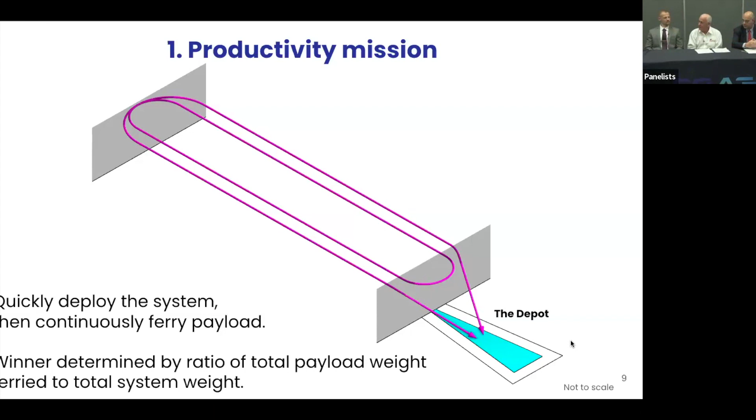No, I don't think that's necessary if you're looking at just this mission, as opposed to the other ones. And again, you could have a heavier vehicle that could carry a lot more of the weight and

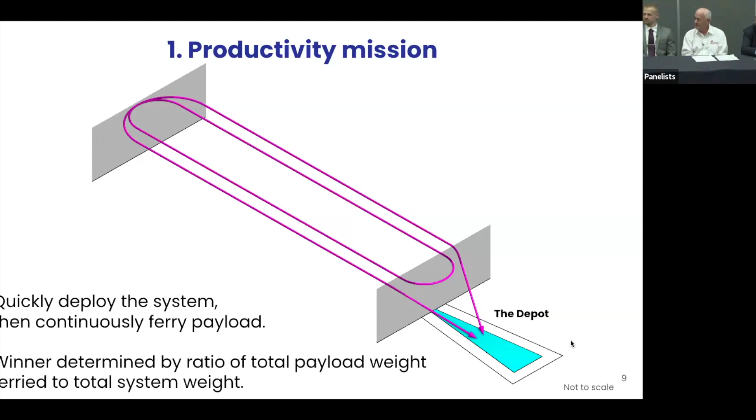minimize the number of times that you have to make the cycle to reach the minimum weight required to score. So I've heard about what the power plant is, what the configuration is, and Mark talks about actually the sizing mission, whether you size it just for one of those loads and do many, as Luigi said, 9 of them, or as Mark said, maybe bigger aircraft do less. Those are the choices available.

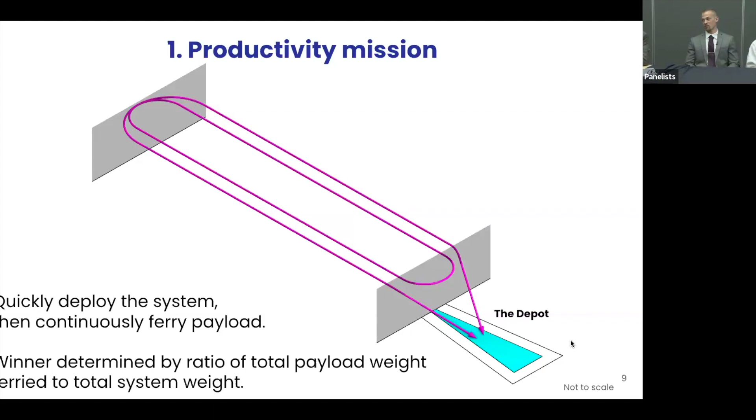Jason, thoughts? Sure, so I'll share a little bit of a unique perspective, but a little bit in agreement with what Luigi pointed out. For the competition that I run, the Vertical Flight Society's Design Build Vertical Flight Competition, one of the toughest aspects that the teams probably don't really anticipate ahead of time are the operation side of things.

So not only how well their performance of the aircraft is going to be, but actually when we give them access to the flight line, they're on the clock. And so when we say, okay, you're up, they have to get out on the flight line, turn on the aircraft, get everything hooked up, get their ground control station and their autopilot and everything like this set up. And that's usually what takes the longest amount of time.

So in this first part of the course and part of the mission, I think maybe the swapping of payload, physically getting the aircraft onto the field and getting it operational is going to be a challenge that the teams probably aren't too concerned about yet. And I think that's maybe where the emphasis should be.

Right, so inserted into the mission is that transportation, with points available for doing better and clearly penalties for taking too long, because it comes out of your productivity time. So good point. So we've talked about the payloads in several ways. We've talked about the transportation. Thank you, good comments. We're going to move on now to the next mission.

So the second mission is adversity. And while we've modeled this in terms of what we think it'll look like, we haven't offered that. We've only shared what the different landing sites are, with a requirement to loiter in each of the landing sites, either airborne loiter or ground loiter. And the base is where we start.

We have dry sand, a hill, which could be very interesting, a water-based with a challenge associated with it, the tornado, which will represent turbulence, and then an unknown, which will have some sort of on-the-fly, real-time decision how to approach that landing, which could be manual, which could be automated.

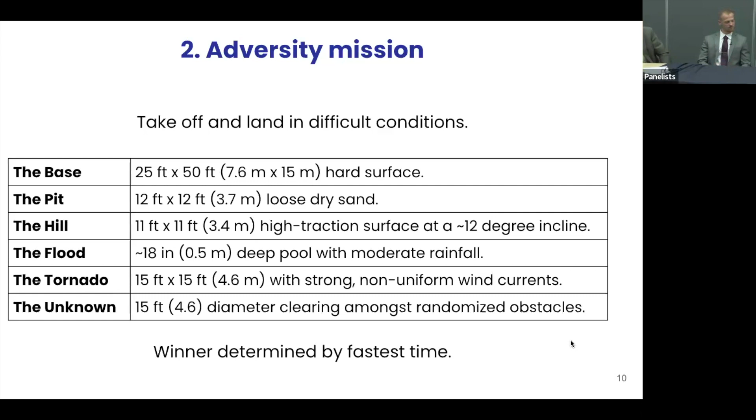Yeah, Mark adds. Yeah, a couple of things. First of all, with some of the things not completely defined, like the tornado, designing for your stability, you have to make certain assumptions about how much you want to design for, because it could be 40 knots, it could be 80 knots, 120 knots, who knows?

Also, when you're actually flying the course, because you're having to design for possible sand ingestion, water ingestion, and so on, you might even be considering what order you want to fly in to maximize the easier ones for your configuration first and save the harder ones for later.

Yep, good point. It was pointed out to me this morning that we're not actually addressing some of the more challenging aspects for firefighting, which is the acidic environment that tends to get into seals and things. I recognize that's something we couldn't necessarily test for, but it is one of the bigger challenges for designing a firefighting aircraft system. Luigi, any additions?

I would suggest a couple of points. Look at the different operation zones and landing requirements, and consider two aspects: the power required to cope with those conditions and the specific type of landing gear, and see whether choosing a different sequence of tackling the landing zones and maybe having a reconfigurable aircraft. I don't want to get into details, but you certainly can imagine what that could possibly be.

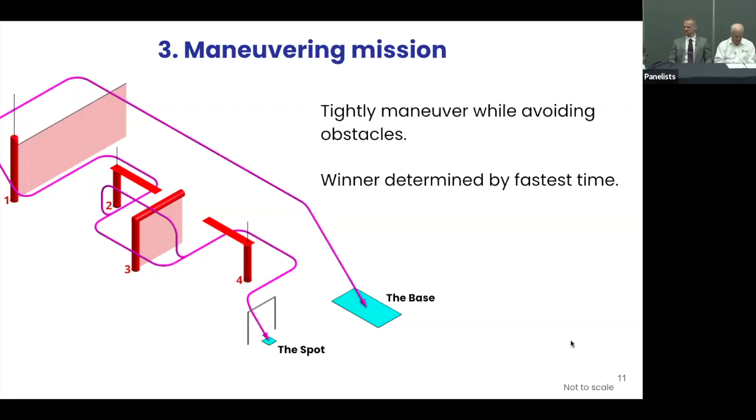And I want to invite Sky. Any comments here that you'd like to add based on what you've heard? No, I just wanted to make sure it was clear that all of the missions are ranked. It was mentioned that in mission number two things were pass-fail. That one is also, like the maneuvering mission, ranked by who was able to do it fastest.

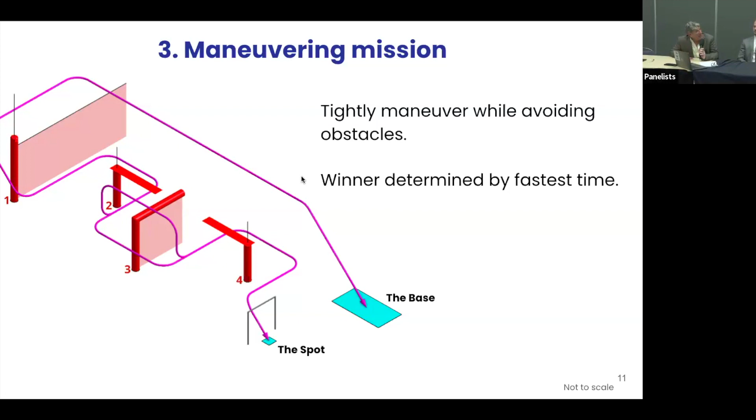Okay, right, so time is important in missions two and three. And there's also this trade that strikes me as -- a mentor once said, the best way to go fast is to go slow. So we've got the tortoise and the hare, with the recognition that the fastest adds risk. Every one of these participants has the opportunity to trade optimized performance versus a little bit of margin to reduce risk.

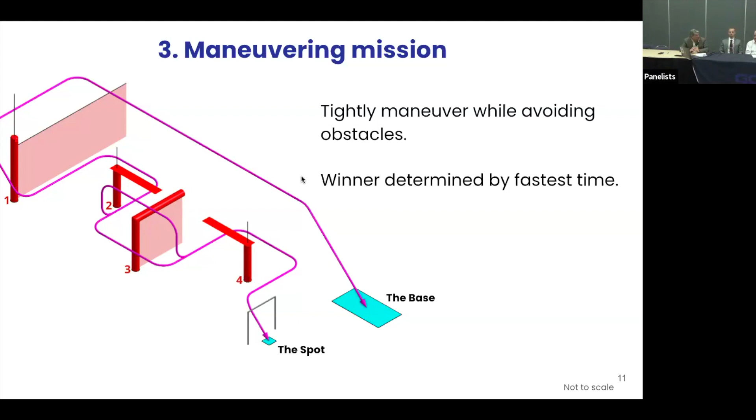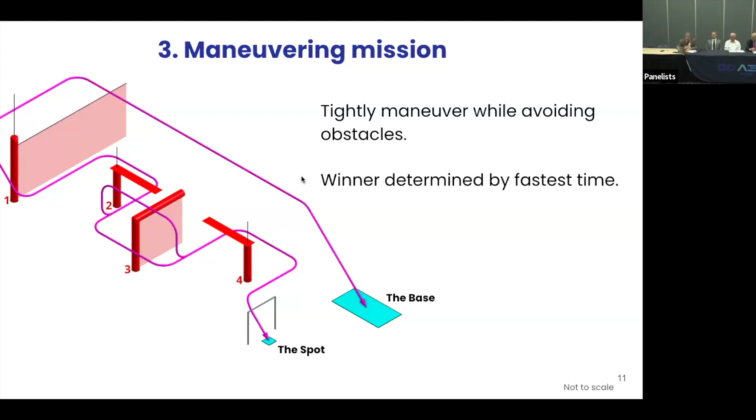Okay, that's good, thank you. So next, having done the three missions, before we get to the questions, we're going to go to the next chart. There's an overall top prize, and the top prize is based on a combination. So here's the summary. Before we do that, the productivity, as Sky said, is to quickly deploy, and it's amortized by the total weight.

So it's the total payload weight divided by the gross weight of the system. So that's a ratio and ranking. Adversity is time-based, and maneuvering is time-based. So different metrics, different capabilities.